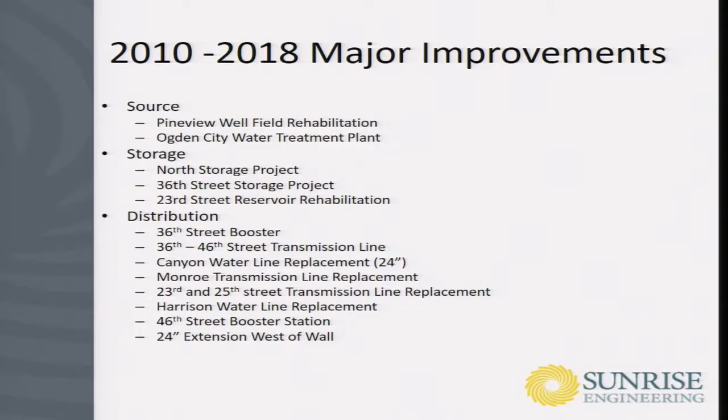One of the major changes from the 2010 master plan to the 2017 master plan is the Governor's Office of Planning and Budgeting has changed their projections for the area. Back in 2010, they had more of a straight line projection with the population going to 116,000 by the year 2050. They have since reevaluated that and looked more at when cities start hitting their build out and there's not much area to grow.

And in my opinion, they've become more accurate on their population projections, and it decreased in 2016 from 116,000 to 105,000 in population. As you can see on the curves, the curve basically flattens from the year 2030 to the year 2050, which would be more similar to Ogden City hitting their build out.

And how this affected the master plan is primarily with regards to source and demand production. The biggest change was obviously in the year 2050. In the previous master plan in 2010, the projected peak day demand was 49.2 million gallons per day, which is what the system would need to produce to keep up with system demands. With the updated projections being lowered, this has lowered to 45.9 million gallons per day, which we'll see later affect some of the projects that we had projected in the 2010 master plan compared to the 2017 master plan.

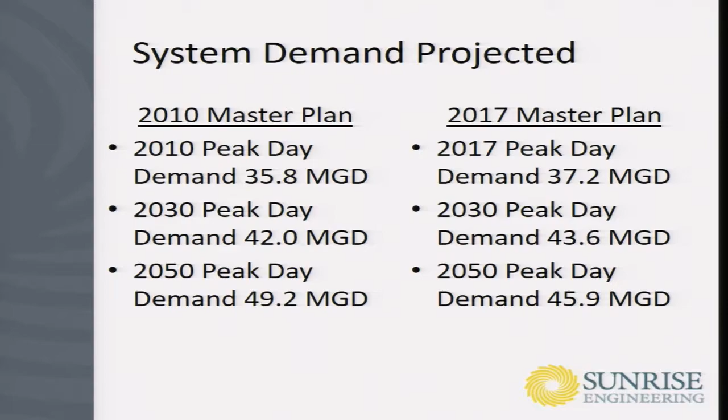Separate from the population projections, as we've looked at the historical production of the sources, we've seen a reduction in source produced. What's important to note is it's not a reduction in water used by the customers, it's actually a reduction in source being produced. The difference being the customers are still using the same amount of water, and we've seen an increase in population over the 8 years. However, we're producing less and less water.

This can be related to multiple projects that we've done on pipeline replacements. As the large transmission lines were being replaced, numerous leaks were discovered, and we were able to put new pipe in and stop these leaks. To get a better feel for how much water we've saved in pipeline replacement projects alone, it equates to 584 million gallons per year of water saved. And to get a better understanding of costs, if we were to purchase that water on the open market today, that would cost us over $1 million.

So we've seen significant efficiencies in the water system with the pipeline replacement projects that we've completed. As you can see, that's over 1 million gallons per day that's being saved. And even more importantly, on a peak day projection, with the additional storage that we've added, we've seen our peak day drop from 35 million gallons per day down to 28 million gallons per day, which allows us to have a lot more efficiency in the system and move water around as needed.

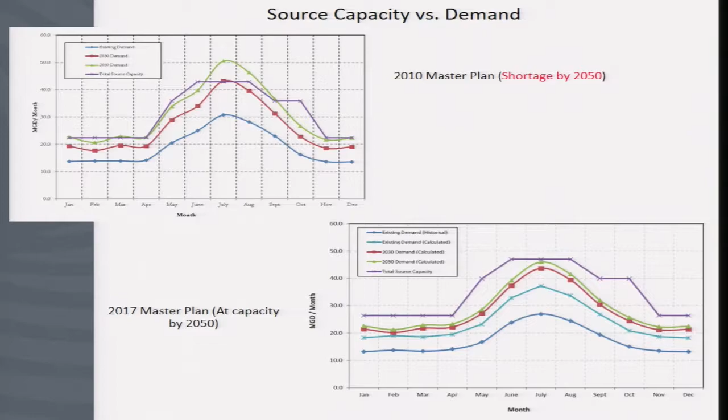And so there were a number of major leaks that were found and replaced. And the result of those two items, the population being slightly less and the reduction of historical produced water, is that in the 2010 master plan, we were predicting a shortage of water by the year 2050, i.e. we need new source. In the 2017 master plan, by the year 2050, we're actually at capacity. So we were able to take out a capital improvement project with those changes.

Another significant change from the 2010 master plan to this master plan involves the demand areas, which were very critical in the 2010 master plan. There were 3 main zones, Zone A, B, and C, with different sources conveying water to each area. For example, Area A, the southeast portion of the city, was directly served by Weber Basin water, and we were unable to get any water produced by Ogden City into that zone. Same with Area C, which was historically all Weber Basin water, with none of Ogden City's water conveyed into those zones.

With the addition of transmission lines and booster stations, we are now able to convey water from Area B to Area A, and B to C, and vice versa. This gives the system a lot more flexibility than it had in the past. If any of the major transmission lines go down and we have a break, we now have a method to move water around to keep residents and customers in service.

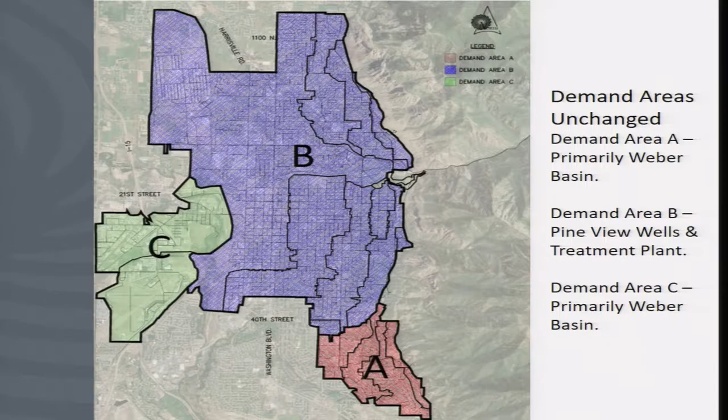If the water system was new today, we really wouldn't have very many capital improvement projects in regard to source. However, the system is aging and fairly old. Most of our capital improvement projects that are source-related are basically replacing existing infrastructure as it ends its useful life. There are 4 wells up at the Pineview well field that we recommend replacing during the study period: 2 wells in the immediate future within the next 5 years, and the other 2 wells as they age, within the 30 to 40 year master plan.

The other source-related project is to revitalize the airport well, an old well that has not been in production over the last 10-15 years, but it's a good source of water if we revitalize it to serve the airport area, which currently just has Weber Basin water as its source. Those are basically the main projects programmed in the current master plan for source, with a total cost of just over $11 million in today's dollars.

As I mentioned before, we had a number of storage projects over the last 8 years that has really put us in excellent shape from a capacity standpoint. The global analysis on storage shows that we actually have a surplus in the system. The 2050 storage requirement by the Division of Drinking Water was roughly 35 million gallons, and we currently have 72 million gallons in the system.

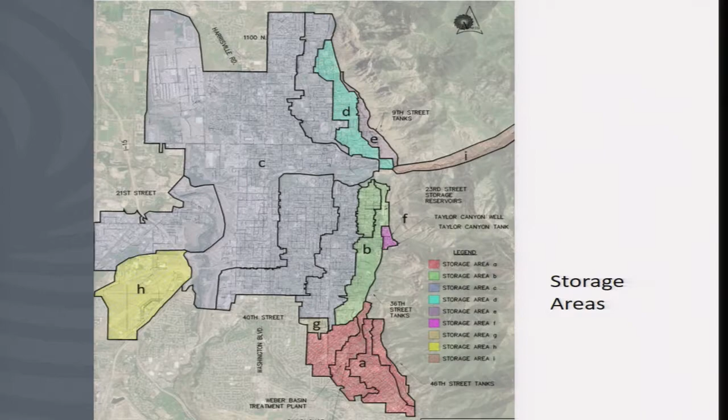Very similar to the source, the storage projects associated with capital improvement projects are primarily replacement projects. Currently, the 46th Street reservoirs have a number of leaks, and one reservoir is offline. We are looking to rehab those reservoirs, but in the event the rehab fails, we've programmed in place to add 2.5 million gallons of storage in the 46th Street area, basically replacing the existing reservoirs due to the age of the old concrete reservoirs in that area.

The other two projects are for Area G and mainly just interconnecting piping to access the storage that we have.

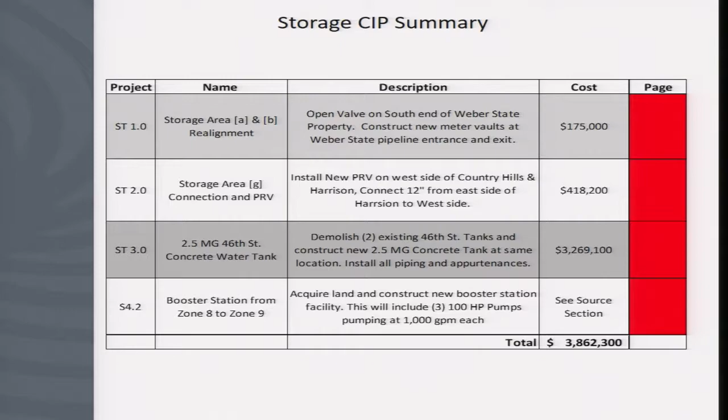The largest portion of any water system is obviously its distribution system, and Ogden City has one of the largest distribution systems in the state. They have a total of 371 miles of pipeline buried underground to convey water to customers. To get a better understanding, that is basically a pipeline from here to Las Vegas.

It is a large undertaking for staff to keep the water system up to date, to keep all the pipelines functioning, repair the leaks, and to better understand the size of it. If we were to replace all the pipelines in today's dollars, the asset would be worth over $500 million, and $600 million worth of replacement to replace the existing water system.

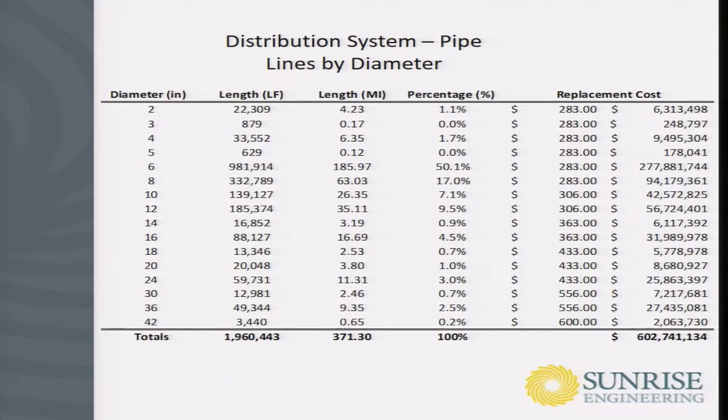In addition to being undersized, the pipelines are - as Ogden City is one of the older cities - an older system. The life expectancy of a water main is roughly 100 years, and by the end of the study period in 2060, 55% of the system will be over 100 years old, which means a lot of repairs and replacements will need to take place in this study period and in this master plan.

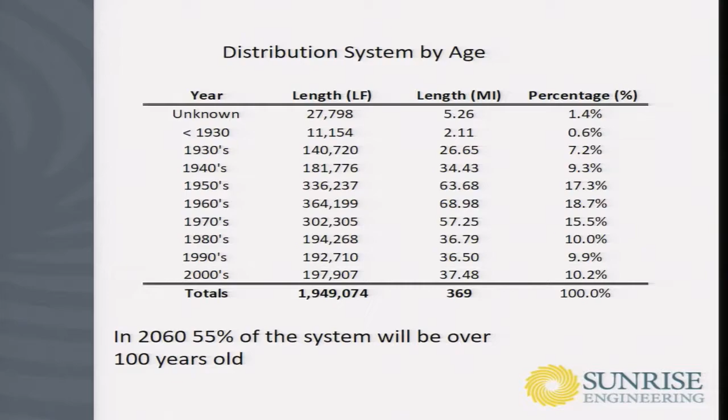In order to put a pipeline replacement program together for the city, we looked at a number of publications and used the pipe survival curve of ductile iron and cast iron pipe, since it's the bulk of the material in your water system. This study looked at 4 communities across the U.S. - LA, Boston, Philadelphia, and Fort Worth, Texas - and looked at the historical replacement of their water lines, when the lines had failed, and at what age they had failed.

We put an average of the 4 systems together and called it Ogden City's pipe survivability curve. Using this probability curve, we put a statistical model together based on the age of the system and when pipelines should be replaced.

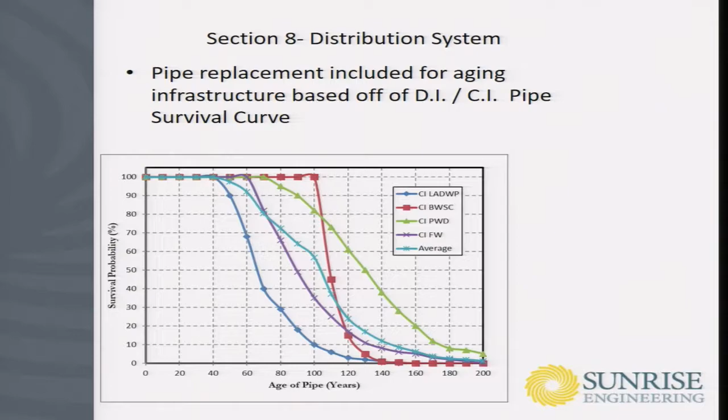What we found out in the study period is that we would need to replace over 815,000 lineal feet of pipe in the system to keep it as is. This is not getting ahead of the curve - this is not replacing 2-3% of the system to get ahead of where we're at. This is replacing roughly 1% of the system per year, which in 100 years will put us in the exact same situation we are at today.

In addition, we put together a chart to show how inflation affects those numbers. As we are coming to the end of the last master plan cycle, a lot of the projects we had programmed in 2010 were now becoming over budget - the dollar amounts we had programmed were not enough to do the replacements in today's dollars. Looking at the historical inflation cost of construction, it's about 3% per year, so we also included a 3% inflation rate.

To better understand that, the $5.7 million per year in today's dollars - that same lineal foot of pipe at the end of the study period will cost $16 million per year, which is something the city definitely needs to be aware of as it puts together its pipeline replacement program.

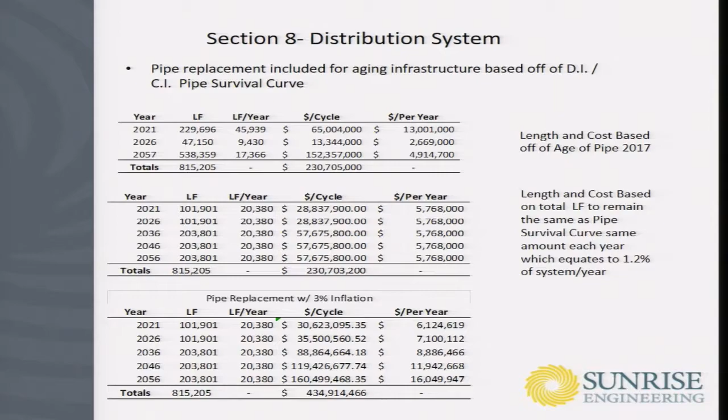So in summary, on the capital improvement projects, we had $10 million worth of source projects, $4 million of storage projects, and a whole lot of distribution projects on pipeline replacement. We broke it up into a number of categories on the pipeline replacement projects.

We've identified needs in the city from fire flow and pressure standpoints. Those took the highest priority in the capital improvement project list to bring the system up to current drinking water standards. We also spent a considerable amount of time analyzing the existing leaks in the system, which pipelines are not failing based on statistics, but are failing today based on the number of leaks that Kenton's crews have to deal with on a daily basis.

So on the distribution, fire flow, and pressure projects, they were a total of $23 million. On leak projects that have been currently identified, it totaled $72 million. And then we had $135 million worth of improvements based on the statistical model of pipeline survivability, understanding that as the system ages, we will get more and more leaks in the system.

In putting together our 5 and 10 year lists, we met with the city and staff and kind of put together the highest needs on the priorities.

As mentioned previously, the 46th Street tanks—if the rehabilitation we're currently trying to do on the tanks is unsuccessful, that'll need to be replaced right away in the 5-year plan. We also need to replace 2 wells up at Pineview Reservoir. 2 of them are seeing significant decrease in their production, and they'll need to be replaced right away in the 5-year plan.

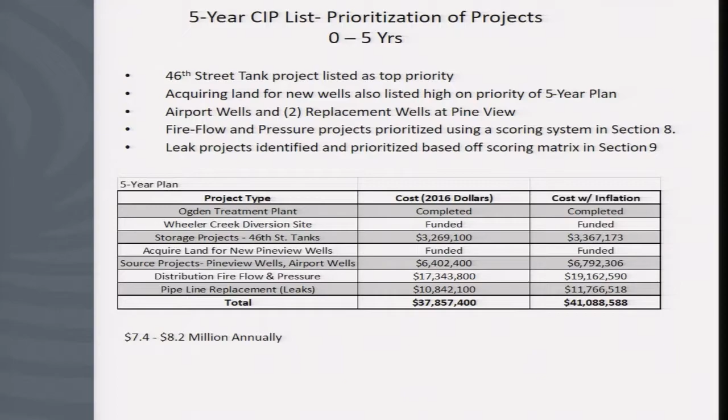In the 5 to 10 year projects, we wanted to do the 24-inch track line extension project to convey more water to the west side of the West Industrial area.

We also want to complete those small storage projects. Currently, the need's not super high for those, why we pushed them off into the 5 to 10 year plan, because Weber Basin does have storage available for it, but we will need to transition that over from Weber Basin to us. And then we'll start into, again, the pipeline replacement projects.

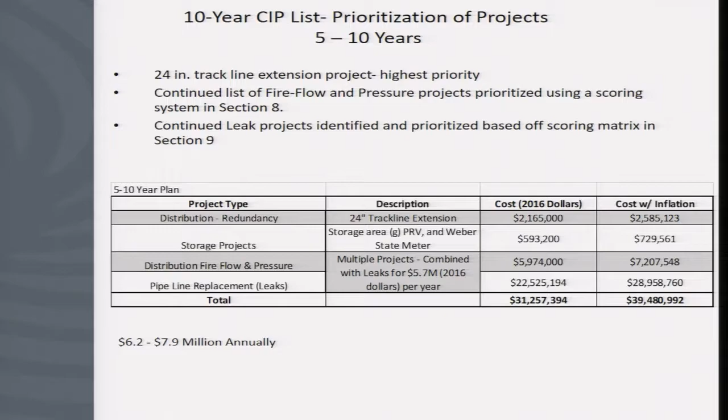In the 10 to 40 year plan, we do have to replace 2 more wells, probably in around 20 to 30 years, up at Pineview Reservoir. We'll also need to look at the Ogden Canyon 36-inch line within that time period.

In the last 8 years, we did replace the 24-inch line that came down the canyon that had a number of significant leaks on it. We thought we were going to have to do the 36-inch line within a 5-year time period. However, the city has done an extensive study on that line, and it was in better shape than we had anticipated, so we pushed that off into the 30, 40-year time frame.

So that cost of inflation reflects the full 40 years? Correct, yes. As you can see, the cost in 2016 dollars, then cost with inflation, is where we've got it programmed in the master plan.

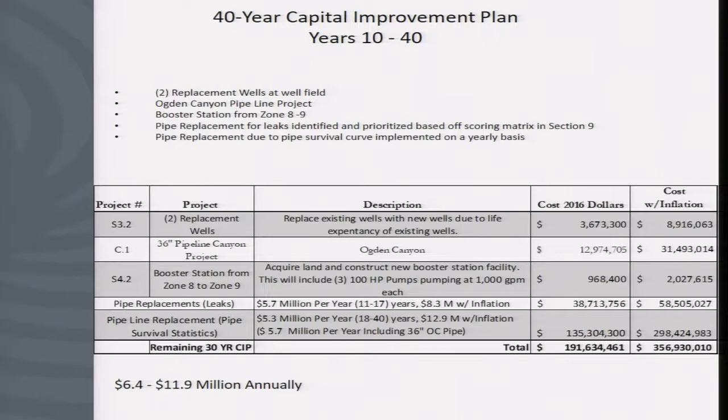And really, your system, from where I started on it 10 years ago, has seen significant improvements. I know these dollar amounts are large and can seem overwhelming, but the system is in really remarkably good shape with the projects that we've done over the last 10 years. If it was new, it would be an A-plus system in the state. The biggest problem with the system is it's old, it's aging, and it's going to take a significant increase in dollars to keep the system running.

I appreciate your time and would love to answer any questions that the council has.

Any questions for Mr. Linford? I have one.

This 24-inch pipe that's going out west, is there that much of a need for water out there? I mean, one of our main transmission lines down the canyon is 24 inches. Just my logic says I don't know why we'd need that big a pipe there. There's a lot of large water users out west, and coming down the canyon, you actually have a 24 and 36 inch coming down the canyon, and the combination of those two is 35 million gallons per day. A 24 inch by itself is only about 8 million gallons per day, so the bulk of it is actually in the 36 inch line, in the bigger pipe.

That was also one of the areas we looked at and determined that if we had a large water consumer show up in the West Ogden or Ogden City Industrial Park, we wouldn't be able to meet their demand, and so that would help us to be able to meet that demand. What kind of businesses would use lots of water? I think of car washes and stuff like that, but the example I would give is like a Fresenius. They make medical devices, so it could be a lot of different businesses like that.